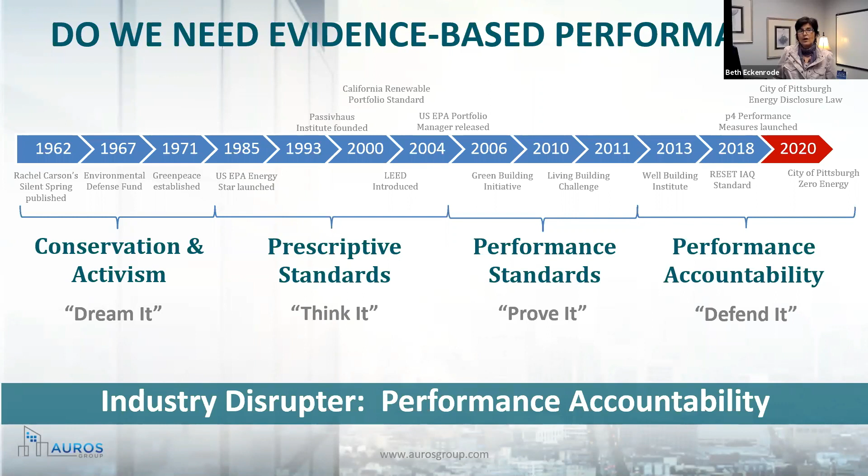It started in the 60s with conservation and activism, and then went into prescriptive standards like LEED, and then evolved into performance standards. But today, it's about performance accountability. And if you are somewhere in the world where there isn't performance accountability, it's coming. And it's coming fast. And it's coming because more and more building owners are being held accountable to two things: environmental health and human health and well-being. Those are becoming imperatives. And so when you think about, do we need it? We believe the industry disruptor is performance accountability.

How do we reach it? And what's the first step to take to get there? The answer to those questions are exactly the same. And Stephen Covey laid it out beautifully with, we have to begin with the end in mind. Ergo, why I asked you to switch from thinking about design to thinking about operations. And so when we think about owner's project requirements, it's a term that's been around in the industry for a long time. And owner's project requirements really started out as almost being like a strategy document. It was a lot of narrative.

Where the puck is going is it's all about metrics. And why is that? Because the easiest way to align team members, think about your team members, architects, engineers, commissioning agents, the best way to align them on a project is to metrics, not to words. Words leave so much open for interpretation. It creates paralysis on teams. Metrics gives teams the chance to bring their expertise to bear and come up with the 1 + 1 = 3 or 1 + 1 = 5 solutions.

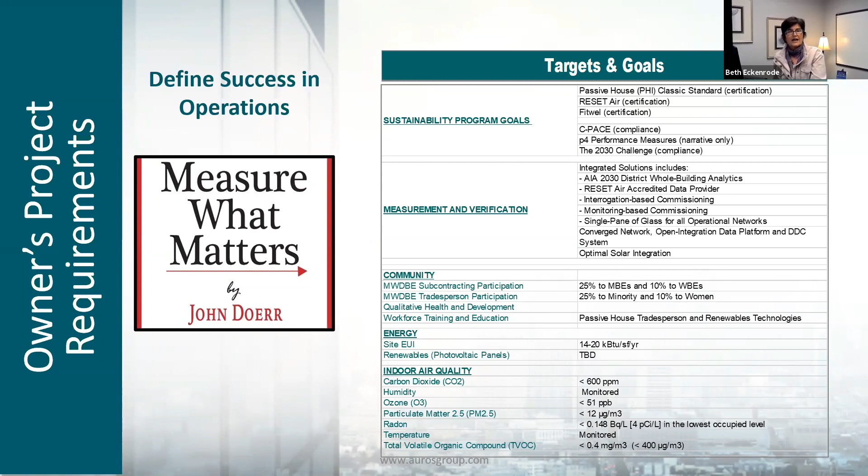So at this point, all I want you to think about is that owner's project requirements should never be about words. It should really only be about numbers. And those metrics should demonstrate what's expected performance in operations. Again, how are you going to define success when you're operating?

And so for us, what we say is, find what's actionable, and really the two threads that weave together all of the goals in the UN SDGs are reduce or eliminate fuel poverty and drive to equitable indoor air quality. And so those threads are really values. And those values underpin the choices that we make. And so if we're really good, our goals will align with our values. And when they do, we know we're moving the needle.

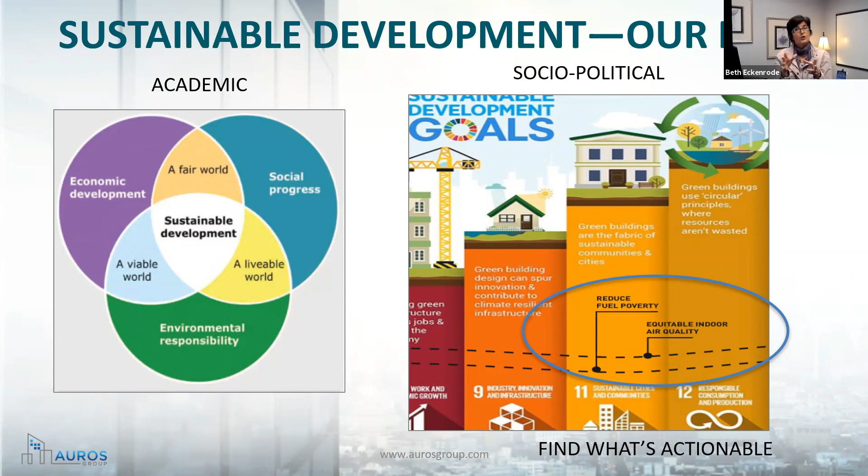We believe any building can be high performing, an existing building or a new building, doesn't matter. But to do so, you have to know, understand, and find a building's potential. And a building's potential, new or existing, is found by merging the digital with the real worlds.

So simulation that meets up with trended data or expected data. For us, this is where technology begins to reduce the risks of boldly stepping forward with sustainability goals. But there are different kinds of technology, right?

Craig's going to go through this in a whole lot more detail a little bit later on in the presentation. But to achieve evidence-based performance, it requires building science and data science. And we can't really conflate the ideas of high performing and smart.

There's a lot of conversation about intelligent buildings, right? You can have a really smart or intelligent building and have it not be high performing. So there's all kinds of technology available to tell you everything there is to know. But we need to take a surgical approach to choosing what technology to employ based on what we expect it to deliver in operations.

So again, we align the thought of high performance with using data from an Internet of Things standpoint, or smart buildings, intelligent buildings. We align those goals to what we've set as metrics along with our values.

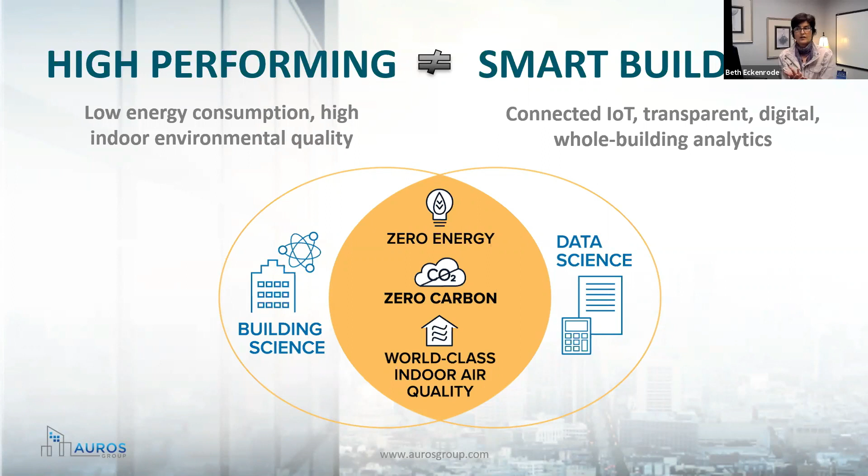Now, we continue to try and drive with a process that will get us the highest performing building at the lowest possible cost, right? Because we're getting really laser sharp and laser focused. We want to find that sweet spot between high performance before we have to pay any premium in the cost of construction. I want to stop for just a second and make sure we're aligned and landed on terminology.

Energy use intensity, water use intensity - these metrics exist to compare buildings and their performance one to another, much like how miles per gallon gives you the idea of the fuel efficiency of one car versus another, or one truck versus another. So for us,

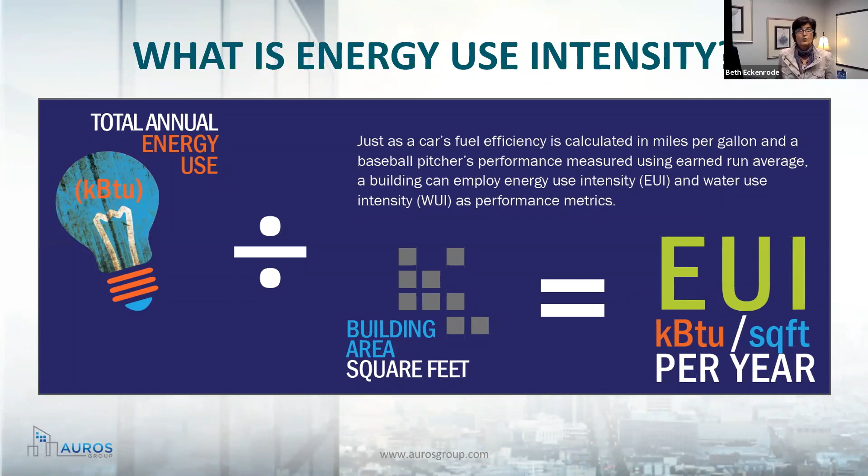setting goals and getting to a really robust goal setting process isn't just a piece of something, it's everything. And no special skills are required to do this. So any building owner, any developer, any team member can sit down and think about how do we articulate the goals of a project against what we want to measure, what we want to define as success in operations.

But we need to cast a really broad net. So I'm going to run through a very quick review of a subset of standards and certifications. As Jay mentioned, we're certified in everything because we never want that to lead our thinking. We don't want to come to a problem with a solution, right?

If all you have is a hammer, everything looks like a nail kind of thing. We don't want to come to the solution because that happens to be the certification. We want to be agnostic and indifferent. And there are a lot of practitioners in the space that think the same way that we do.

This is not unique to Auros Group. But it's important to understand as we go into this next part of the conversation, we're not marketing or trying to push any particular program. We're trying to get to how do you think about evidence-based performance in a way that gives you the most performance at the least cost.

That is going to require thinking about the buffet. And for those of you on the West Coast approaching lunch, I'm really sorry, but I want you to envision a really bountiful buffet, because we're going to go through a bunch of standards that are going to show you various items on the buffet.

So we want to know where the puck is going, and we think the buffet is where the puck is going. So we're going to start with LEED. LEED is kind of the granddaddy of all standards, right? The world owes a debt of gratitude to LEED.

20 or so years ago, LEED really kind of put the path in place for what it means to build a higher quality building. What does building performance mean? And it was all about building design and what to consider to build better buildings. If you could go to the next slide, Craig.

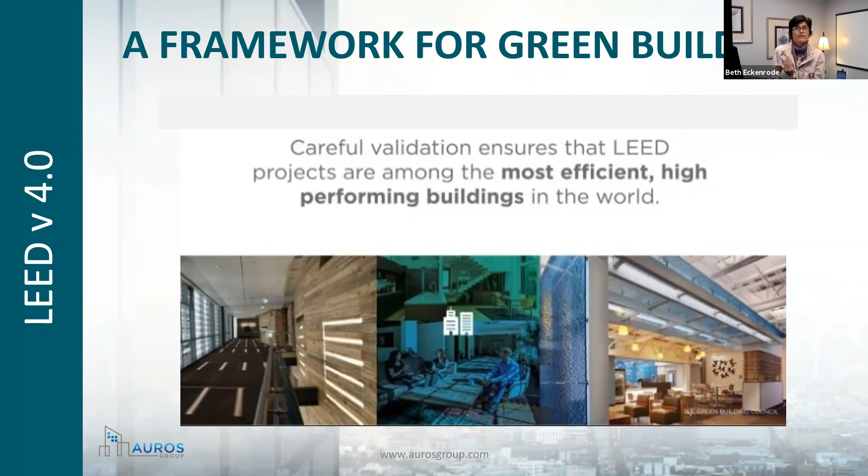And we're going to talk about both in the course of the next few minutes. We're going to talk about both types, and then we're going to kind of wrap it up and explain why that's so important to understand the vantage point from which these standards come as you think about setting goals.

ILFI created the Living Building Challenge, which is based on ecological research. Ecological research is all about the study of relationships between living organisms and their environment. And it's not just living organisms inside the building, it's living organisms outside the building too. It's the environment outside, it's the environment inside. Living Building Challenge really has cast the broadest net of how to think about building performance when it takes an ecological point of view.

It has about 7 petals, and they're grouped broadly along what you can easily call values. They look at values and think about all the elements of this ecological approach, all the pieces that would fit into place, beauty, or equity. They take a values-oriented approach to goal setting, and there are various pathways to reach Living Building certification. All of these, even the ones that look simplest, because of how broad Living Building sets its vantage point and its interests, each one requires a deep commitment. It's very rigorous, and your commitment to individual petals or combinations of petals has to be based on that value. So it's really important to think about how your goals align with your values.

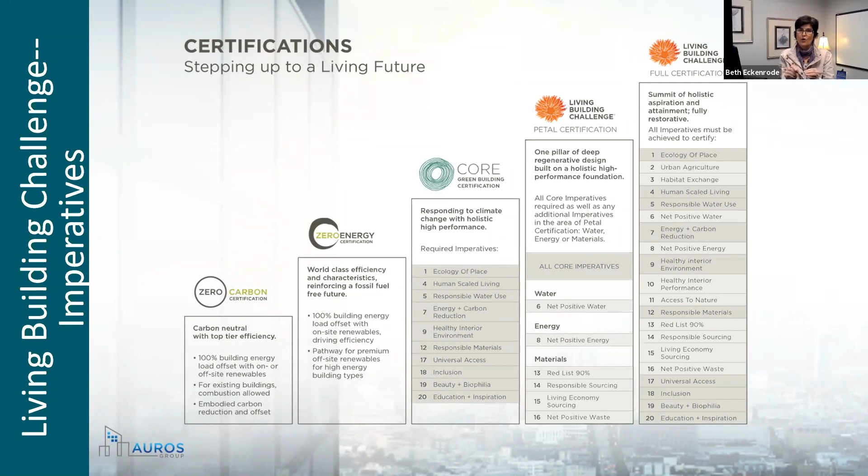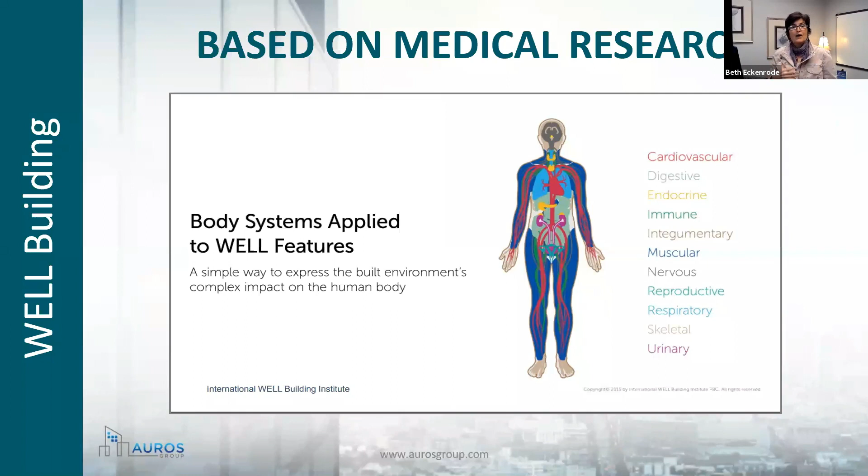WELL says we spend 90% of our time indoors, so we're concerned mostly with one interface, and that's the interface between buildings and their occupants. WELL is based on medical research, but it's based on individuals. So WELL looks at how a building interacts with our individual persons, our body systems, our human body systems on all of these levels. That's the research that WELL brings to the table.

When you think about the comprehensive approach to WELL, it's broad similarly to Living Building, but it's not as broad. It doesn't take on as much space as Living Building does. It's got 10 concepts, over 100 features, and where WELL has teeth is that each one of the concepts has prerequisites. So if you blow a prerequisite, a lot of times in WELL, you blow WELL. There are some teeth associated with WELL that are kind of distinctive. But WELL does absolutely the broadest and deepest job of understanding that interface between a building and an individual occupant.

Now, the middle of last year, WELL came up with the WELL Health and Safety Rating, and we mention this because it's a little bit different than how it approached the broader WELL. This is much more narrow. It's focused on policies and intentions. It was in response to the pandemic, of course. It's had a lot of publicity and press, but it's intended to give building owners and developers the pathway to tell occupants: we're controlling for what we can control. That was really the purpose behind WELL Health and Safety.

When we look at Fitwel, Fitwel is based on public health research. This is a big distinction between Living Building, WELL Building, and Fitwel. Fitwel says the biggest impact we can make on the built environment and people in it is to look at chronic disease and chronic conditions. Anytime you think about public health and chronic disease or chronic conditions, it's about populations in general, not individuals—that's where WELL is distinctive. So Fitwel says we want to look at the health of populations, and we want to look at chronic disease like heart disease, asthma, COPD, obesity, hypertension. All those kinds of things are what Fitwel is concerned about in terms of how people operate and interact with a building and with each other.

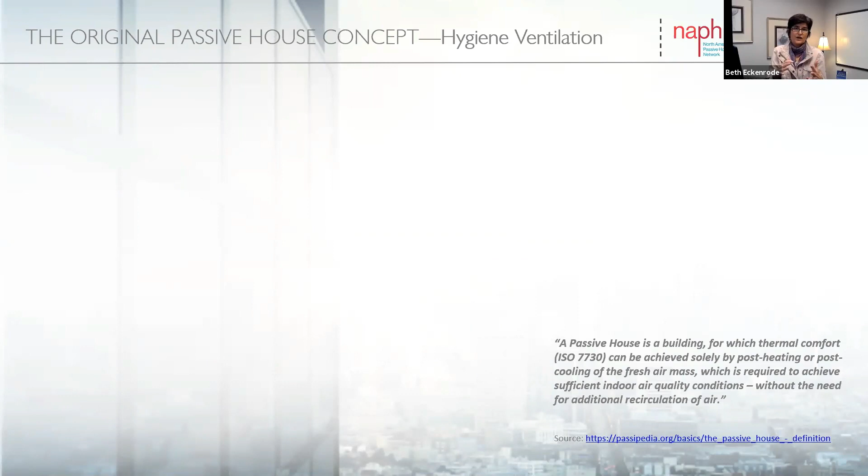What most people don't know is that hygiene ventilation — the idea that we never breathe the same air twice — is where Passive House started its roots, really trying to define how we never breathe the same air twice.

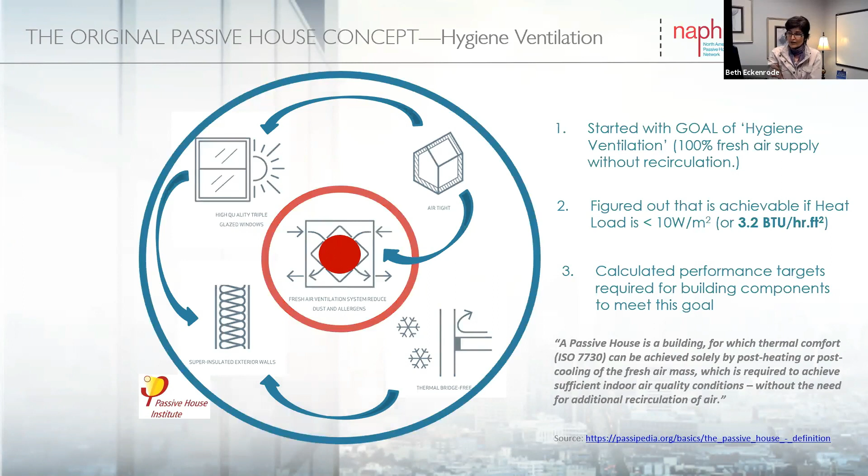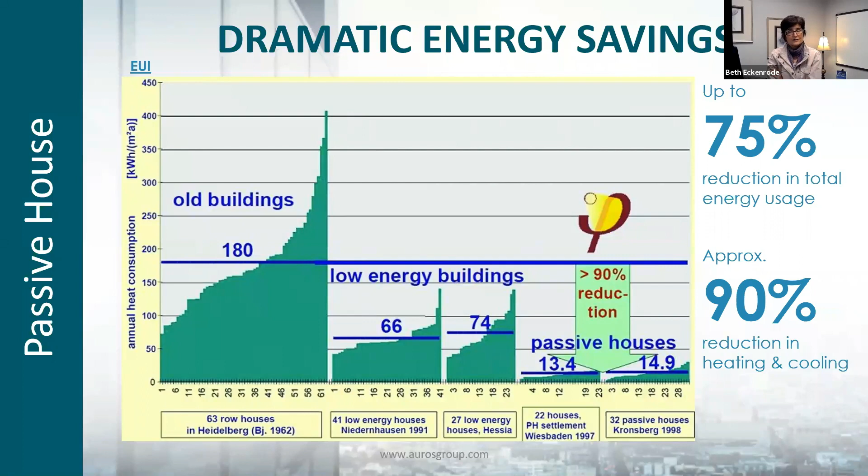However, what Passive House showed is that there was dramatic energy savings. If you remember back in the 70s and 80s, that was what was newsworthy — people wanted to hear about how much you can reduce energy in these buildings. However, today there's as much interest in indoor air quality as there is in energy, and Passive House really enables the conversation about both.

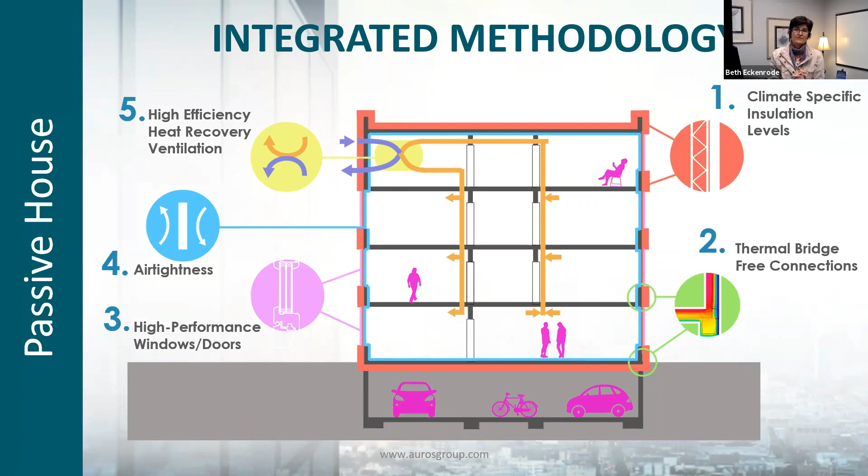So the idea of integrated methodology — continuous insulation, continuous air barrier, thermal bridge free connections, high performance windows and doors, high efficiency heat recovery ventilation — these things all begin to define, from a principle standpoint, what's important, what are the key criteria to consider in order to get to the performance they define. What they're not going to do is say you have to use these windows, or this HRV. They're just going to say you have to achieve this level of performance.

And so what comes out of Passive House is this idea of the natural order of sustainability. It's a little like the order of operations when you learn math — multiplication and division before addition and subtraction. It's the same kind of order of operations: you want to take passive systems first, build the highest performing envelope you can, because that allows you to reduce the size and complexity of your active systems.

The cost trade-off should be similar — you might pay a little more in your envelope, but less in your active systems. The two together create the environment where you can spend the least amount on renewables to get to zero energy. That's why, for example, the city of Pittsburgh, when they talk about zero energy ready, is saying: work all your consumption down using passive and active strategies. Then when we're at zero energy ready, we know we've got the least amount of distance we have to move to get to zero energy. It's the most cost-effective approach to getting to tremendous results like zero energy.

So while Passive House provides the building science to get to both really low energy and indoor air quality, for energy it sets the bar so high, meaning the EUI is so low for what's possible from an energy performance standpoint.

Reset Air does the same thing for indoor air quality. Reset Air sets the highest expectations around indoor air quality performance of any standard, but it goes steps further than most of the other standards.

It goes steps further because it says what's really important is data. So there's what the indoor air quality is, and then there's, are you making it available for people to make their best decisions? So Reset Air says, yes, we have to have high quality monitors. Otherwise it's garbage in, garbage out. We need to know that the monitors measuring the air quality are of a certain quality and capability.

They layer on top of that the standards around where you place those monitors. How many do you need? Where do you locate them in a particular room versus another room? So they set expectations for that.

Then they add on to that, now we care how you manage your data. So to get Reset Air certified, this is the most rigorous and robust process you go through because they also deal with the data. Again, let's go back: to deliver against goals, to set your goals really high and deliver them at par or at the cost of construction, we want to use the best thinking in building science and the best thinking in data science. And all of these capabilities exist today.

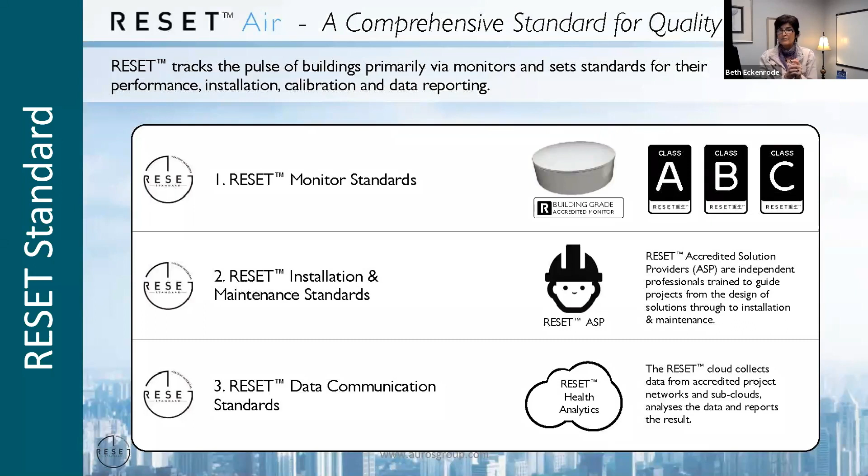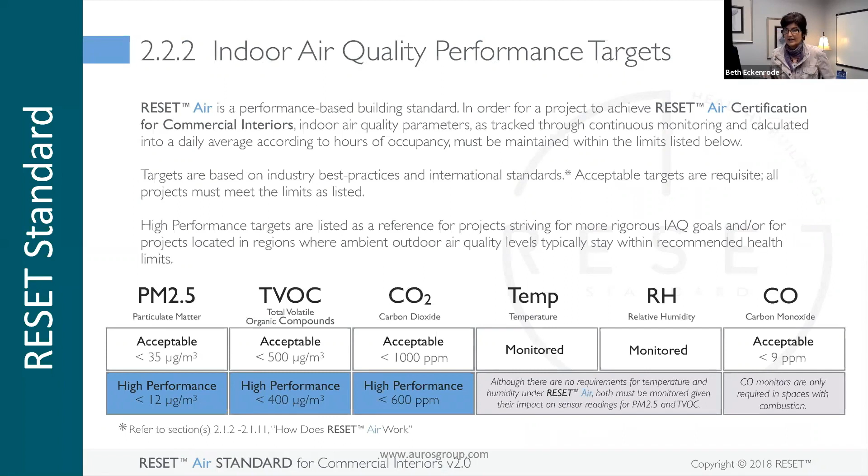The cool interface between Passive House and Reset Air is that we focus on performance where it matters, inside the building and at the level where occupants are living. So we don't concern ourselves with the things that we're not going to measure or monitor, that we won't hold ourselves accountable to one way or another. Again, we stay aligned to goals and values and what we're going to measure in operations.

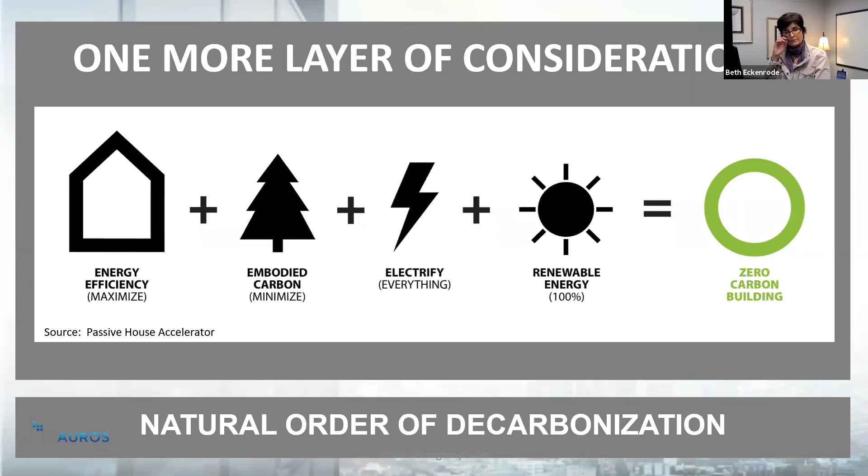So the long way around the barn, as we say in Wisconsin, is that we get back now to how do we set goals. And the reason why we walked you through this review of everything that's possible and how different standards consider different goals is because you want to align it to your values. You want to think about what's important to you.

This takes us back to the buffet. If you want the potatoes, you can take the potatoes. If you want the salad, you can have the salad. So we think about, we might want the water piece from LEED. And Craig is going to, right after we're done with this slide, walk you through a living example of what this looks like. You might want the social equity piece from Living Building.

But what you're able to do is take a very surgical approach to setting your goals against the things that you're going to measure and the things that you actually want to be held accountable when that building is operating. What do you want to say defines success?

So I'm going to turn it over to Craig, and he's going to walk you through a little bit more building science, goal setting, and data science. Thanks, Beth. Hi, everyone. My name's Craig Stevenson. I'm really excited to be here with you today and talk to you guys about evidence-based performance. And evidence-based performance really starts and almost ends with setting your own goals.

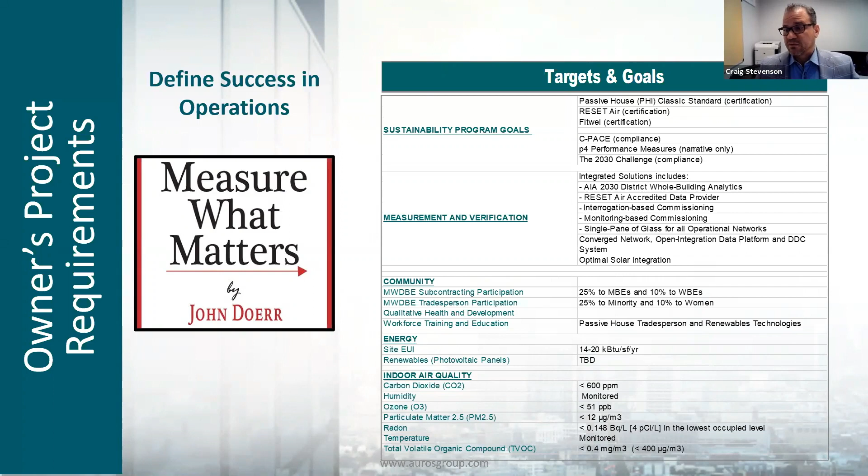Indoor air quality. When you get a copy of the presentation, you'll notice that a lot of these goals that you're looking at in here are built around the most aggressive goals for each of these metrics. These happen to be RESET Air because RESET Air represents the most aggressive, as Beth said, across every sustainable certification program. RESET Air has the most aggressive air quality thresholds, but they are achievable.

And you can start to go through and you'll notice in our OPR, we're actually referencing goals from different sustainable certifications. We're sort of, if you will, cherry picking our way through the best thought leaders, the best sustainable programs that exist for each of these different parameters of quality as you start to consider this.

So the idea here is create our goals early, create an alignment and an owner buy-in, and then start talking about how do we connect these goals to some form of technology or feedback loop so we understand if we've met those goals. We like to think about energy and air quality because when you start thinking about how you achieve these goals, foundationally, the envelope really dictates whether or not you're going to be easily able to get to those. And the cheapest form of energy at the end of the day is the energy never used.

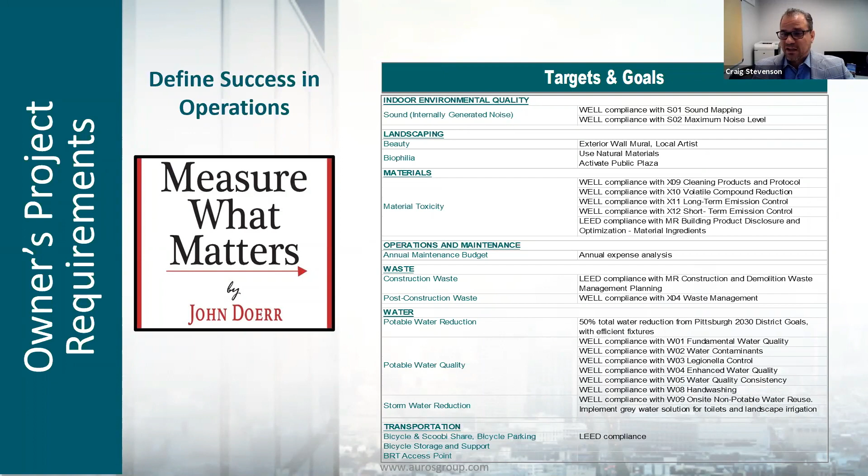So as we go through that, then it becomes how, okay? How do I set my OPR? I feel really good about my goals. Everybody's coming out of our charrette feeling energized, and we feel powerful, and we want to go tackle the world. Then it becomes when. How do I do this?

We're making our biggest decisions on our projects most of the time in very early SD. When you start talking about massing and orientation of your buildings, if you have a new building, when you start talking about window to wall ratios, even for existing retrofits, when you start looking at your envelope optimization, those things are happening really early in SD.

If we wait till the end of SD and we want to go back and talk about our envelope in DD, it becomes really challenging. Most foundational systems are kind of already set, and then all of a sudden we're set in our ways and we can't go back and change. It's a commitment early to the goals. It's using iterative estimating and modeling to start identifying what can we do early.

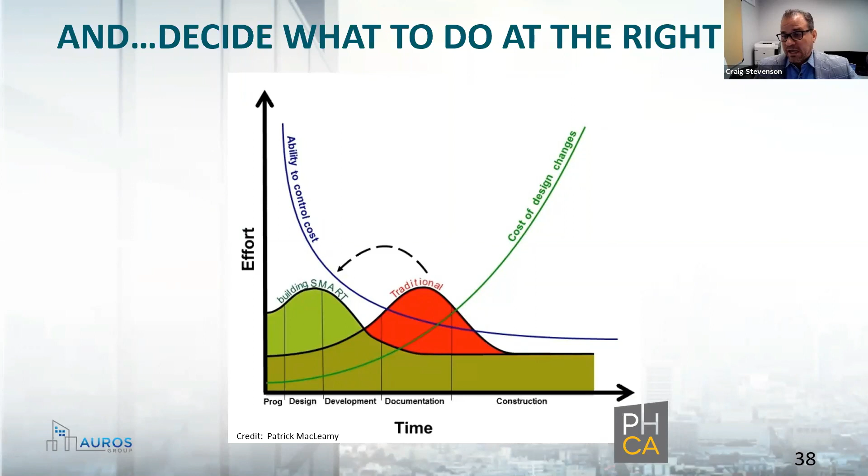So what's the map look like? This really is your critical steps in the process as you start thinking about this, right? How do I get from point A to point B? How do I keep the project team energized and aligned? It takes a strong owner, an owner that's going to commit to an OPR and really have those conversations at every progress meeting: where are we at in terms of our goals? And then it takes a commitment to doing iterative modeling and iterative estimating early.

Even if you don't onboard your general contractor early, you can use third-party estimating to start to answer those questions, because architects are always going to want to know the differences between insulation values, differences between cladding, and how that wall is getting put together. Those have to be answered early. They cannot be answered in value engineering, quote unquote, when we get to construction. It's way too late for that.

And then if you respect the natural order of sustainability and you're looking at your envelope first, your active systems second, and renewables last, you want to start to build out those specifications, again doing that really early in the process. And then you start to look to your integrated network, which is your technology-based feedback loop in the buildings, to start getting those feedback loops built in.

This smart building infrastructure, a lot of people think, wow, I can't afford smart building infrastructure. Well, if you're into any kind of commercial building and you're putting in a proprietary BAS, we're arguing with you, you can afford smart building infrastructure. The macro trends in that industry are moving into open integrated environments, and there are cost feasible ways to put great feedback loops in buildings, including RESET Air and other technologies, to get those integrations between design and construction and operations.

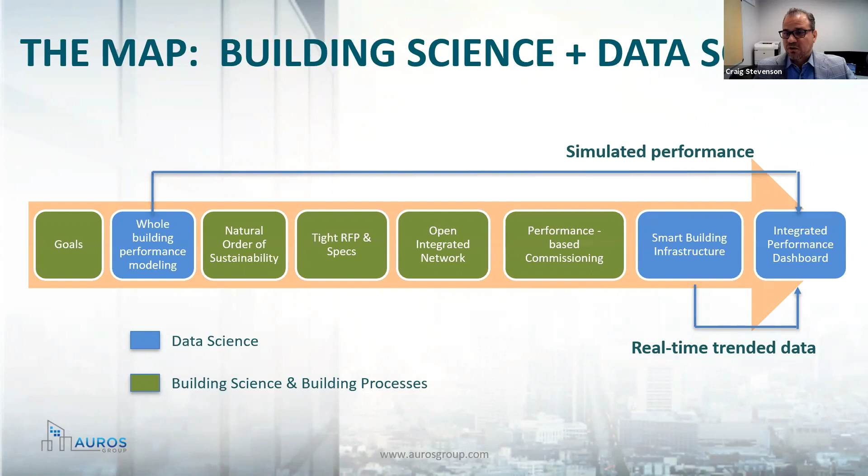So when you think about how we are going to start connecting our feedback loops to our goals and targets set in the OPR, you need context, right? Everybody looks at this a little bit differently. If you've gone into any space on dashboarding, you'll hear them talk about histories. We use history to do that: we were better than we were last week, or better than last year, or the average of the last 5 years.

Or they use peer review like CBECS databases, and they start saying, well, we're a commercial office building, we're better than CBECS by X%. Or they use simulation. The macro trend in the market is moving to simulation. Simulation is by far the most contextual. We can export from simulation all forms of energy dynamically into a dashboard, and this is what you're seeing here.

And we can export temperature, humidity, relative humidity, and CO2 for buildings. So we have parameters for air quality we can look at as well. So the idea is, when you start to think about your feedback loops, how do we deploy meters and sensors, IoT, in a cost-effective way? And then how do we connect that to our goals and targets?

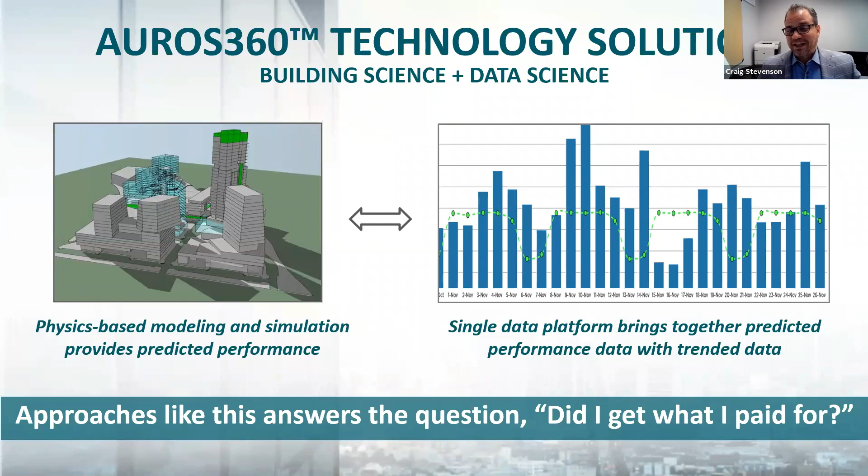We don't want to over meter our building. We want to meter our building just right to give us the feedback loops on our owner project requirements. And then the question ultimately is, did I get what I paid for, or did I meet our goals and targets?

So when people talk to us and ask us about measurement verification, and this is a common question that comes up because a lot of people think that this is cost prohibitive, and we argue it's not. There are 4 main components to any measurement verification in a building. And the 2 things that really I want to align you on and have you start to think about is that 90% of our clients will buy the dashboard because it's the GUI, it's the shiny object. It looks really, really nice and neat.

So they're going to basically go into the market and start searching and looking for dashboards that just have this really shine to them. But there's too many dashboards out there that we've seen that have no guts behind them, right? It's a great visual, but the data behind it's in jeopardy. It's on premises. It's not connected to the IoT in the way in which we want it to be connected. So it's coming directly from that and not being tossed through an analytic or a building automation system.

But the real work here, when you start to consider this, is this intersection between the operational technology, the data aggregation point, and this historian. And how we get data into a single platform for this single pane of glass concept. How do we start to get data into a position that we can use it to our benefit, and we can start to consider it for operations using analytics like fault detection and diagnostics or condition-based maintenance.

So the deal here is that we want our buildings to have a platform for meters and sensors that's flexible. Roll off the obsolete, roll on the new ones, and not take any hits at all. We want it to come through a converged network or a network system that's not going to have to change out. And it's not 10 networks for my BAS, my fire alarm, my lighting control. It's one network. It's a converged network that combines enterprise technologies and operational technologies of buildings. And then it is free flowing directly into our backend, our time series, real-time historian.

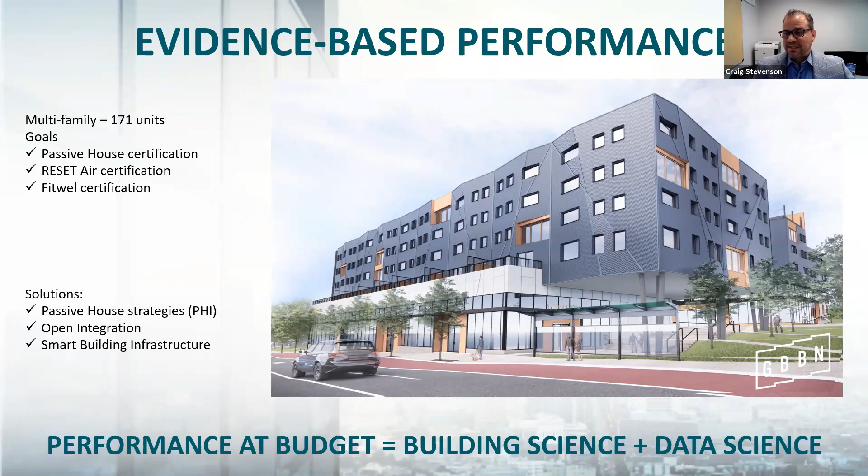Hey Craig, go back on your slide because we have a question, and I think that slide is a great place for you to answer this. Jamal's asked a few questions, but I'm going to get at his last one first because it fits with this picture right here. So he's asking, are we talking about a technology similar to digital twin here?

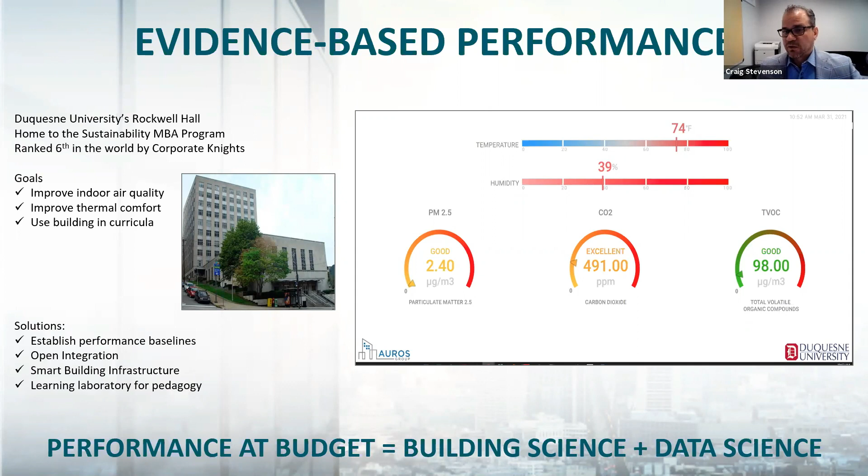Digital twins really can enable an evidence-based performance discussion on a project. But think about when they really come on board—a lot of times we see digital twins coming in as FF&E, like furniture, fixtures, and equipment. They come in with the IT at the end of the project when we're all said and done. Well, if we set our goals, are we making sure we're connecting that digital twin concept back to our goals and targets? I think that's the work we have to start doing to really see digital twins scale.

We also have to figure out how do we not pay duplication between a building automation, building management system, and a digital twin? We're seeing a lot of duplication right now because clients are bringing in digital twins for their value, but they're missing the opportunity to remove the redundancies and duplication of costs from control systems for operational technologies. As a follow-up, Jorge is asking: is the feedback loop or the historian digital twin related conceptually?

I think there are some construction projects out there using digital twins that completely understand evidence-based delivery, and they've created a great OPR, connecting their OPR to their measurement IoT. If they're doing that, the digital twin would be related conceptually to what the project is intended to do.

We've seen too many times that the IoT is deployed, and meters and sensors are selected without regard to the OPR. Then we want to bring in a digital twin and lay it on top of the building like a layer, sitting there as a tool that's not really integrated into the design intent, the engineering intent, and the actual deployment of meters and sensors. In that instance, the digital twin is a bit disconnected until it has a chance over the next few years to burn in and have the owner figure out how to make it work.

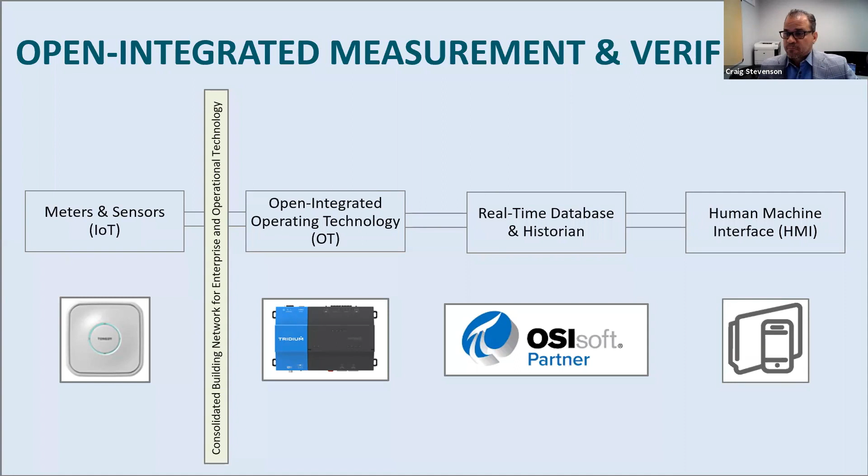So just to follow up, as someone not in construction, is the digital twin effectively a model of the building? There are two models we talk about in buildings. You have a BIM, building information model, which is your 3D model—Revit typically is a very popular three-dimensional building model. That's more CAD. Digital twins can take their data and show it in a CAD environment.

But a CAD is not a real-time time series historian—it's just a way to connect and show data. We can do that all day long. The time series real-time historian is the back end. That OSIsoft PI I showed you is the historian you'd typically want to target when talking about a single pane of glass or a data lake to bring all that data into.

Niagara has a really nice analytical platform, and AWS has a platform too. Depending on which vendor is offering those services, they can be open or closed, so be careful when you look into those environments. There are others like Coppertree, OSIsoft PI, like I said—probably 10 to 15 different time series environments you can look at. As you do it, I'd challenge you to think about it in terms of openness and access, not proprietariness.

So I will finish off these last two slides, and then we'll go back and answer all the rest of the questions, because we got some really great questions, Craig, and we can reference maybe some of our earlier slides to do so. But we promised a framework of actionable steps, and I don't want to miss these last two slides.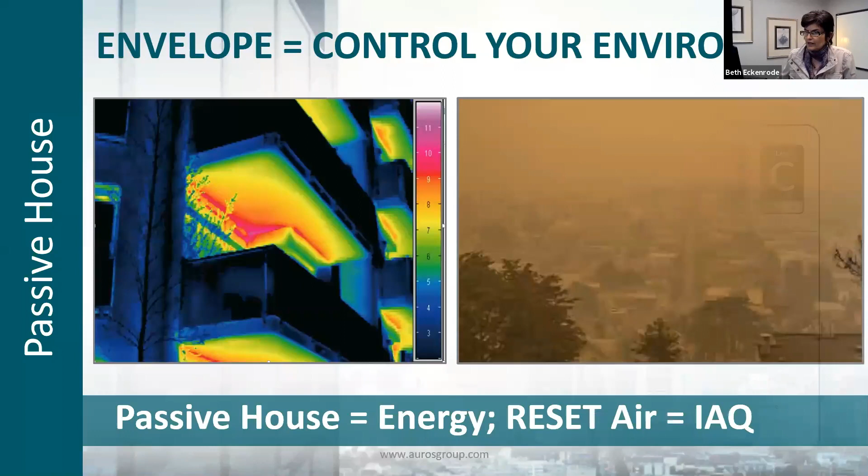So then, Craig, if you go back to slide 35, I can pitch a couple questions to you from Jamal. Jamal's question is: do you think the gap between standards, meaning theoretical, and application, meaning practical, has diminished or narrowed?

I think I wouldn't classify it as a gap. If I was looking at this, I wouldn't classify it as a gap. I would classify it as a change in the way in which we look at buildings. We're moving away from prescriptive-based standards. We're moving very, very quickly into evidence-based standards or performance-based metrics. And we're starting to see early indications of outcome-based criteria.

If you look at New York City's climate action plan, for example, it's legislation that all buildings must reduce their carbon emissions by 40% by 2030 and 80% by 2050. It doesn't care how. That's an outcome-based criteria. So I don't necessarily think that there are gaps.

I do think there's a lot of valuable insight, research, and valuable white papers relating to all these sustainable certification programs, and we respect them all. That's why we select from those the best things that mean the most to our clients, and we use them. But it's moving away — those standards still using checklists and prescriptive-based criteria are quickly becoming obsolete. We're starting to see a transition to performance-based criteria, and more importantly to outcome-based criteria, which needs a measurement verification system to prove.

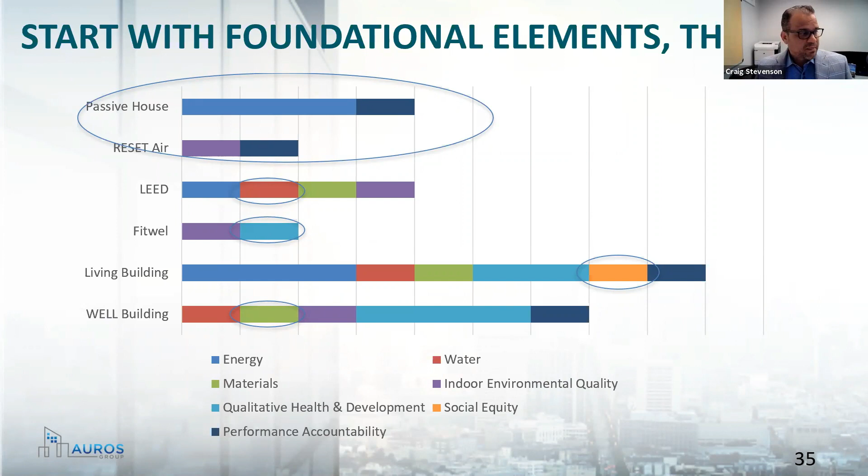So the way we look at this, I think there's a best practice here — Beth, maybe I can go to your slide, let me find the one you always talk about. When we think about this slide, the question becomes: BREEAM is more of a European standard, we don't see a lot of it in the United States.

LEED, we certainly do see. The older programs, the ones that aren't considering energy as well as others, are working their way top down. So if I have a hospital with an average EUI via CBECS or Energy Star Portfolio Manager of 197, what those programs are talking about is doing 15% better than CBECS, or 15% better than ASHRAE, which is our standard. And they start working their way down.

When they do that, they are not able to tunnel through the cost barrier. And there is a cost barrier here where you have to get to a point where your equipment becomes small enough that your envelope starts to pay off. And that cost barrier works down here.

So what we start with, and we think is the best practice, is identify either retrofit, or new buildings. What is the optimum performance of that building? What is the best? And take the metrics of cost off the table just for the quick early analysis. And once you do that, then look and say, okay, how far are we away from being able to afford that? And then work your way up.

So if we start saying, well, I can't afford triple pane windows, but I can afford a passive house envelope, well, then what's the double pane windows do? As long as you're meeting your durability issues, right? The wall is still durable, it's not going to fail, and you're meeting your thermal comfort issues. Can we go to a window that's less expensive, and what does that do? So I'm making decisions from a financial perspective, but I'm coming up.

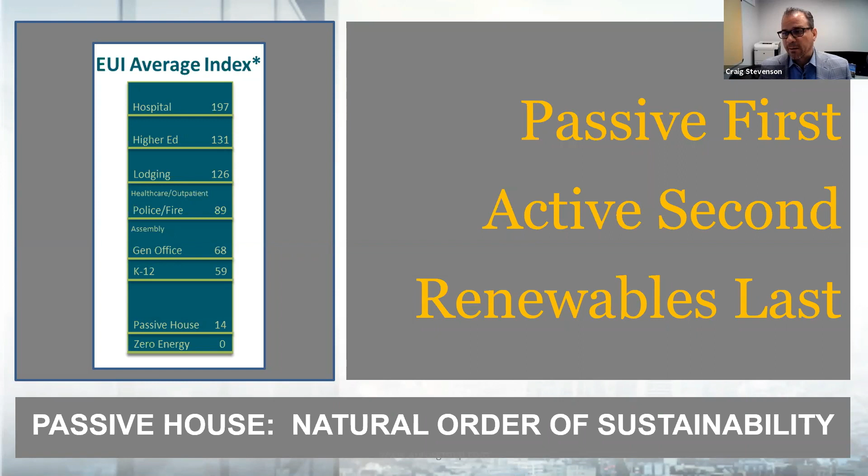So then, you know, funny you mentioned EnerPHit, because Jamal has two questions relating to EnerPHit. The first one is about existing buildings in the UK. So his question is, passive house design standards might be too restrictive to be achieved in most of the UK's existing buildings for retrofit. Even with the EnerPHit standards, many so-called hard to treat buildings are still impossible in terms of achieving such requirements.

And then he went on to ask, which maybe you might want to flip to the cathedral, because he went on to say, has the cathedral achieved EnerPHit requirements? So it might be interesting for you to kind of answer both questions through the lens of East Liberty Presbyterian Church.

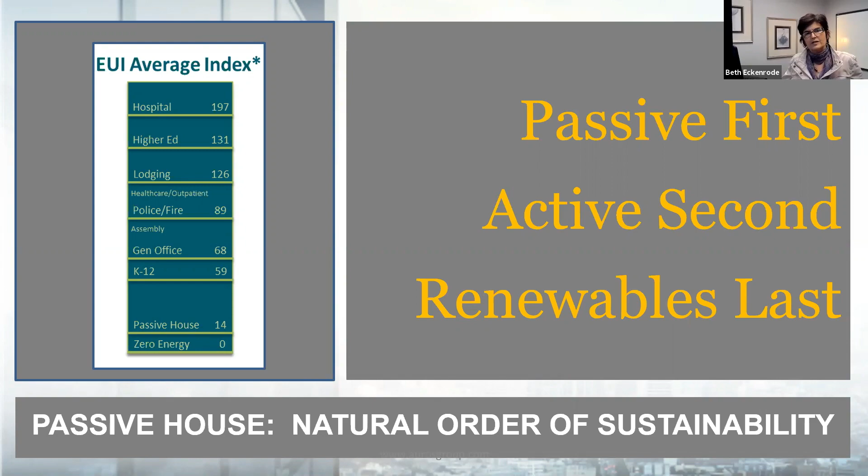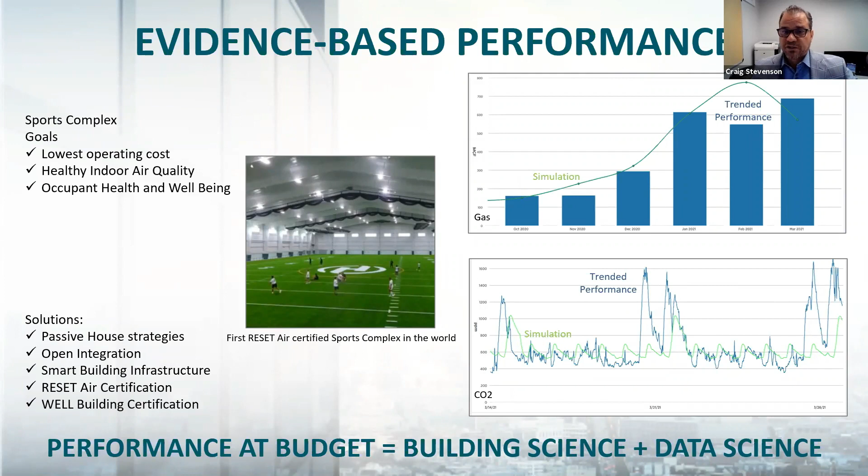So we've been on many projects where we weren't able to achieve, for one reason or another, full performance metrics for, say, passive house, which is the most aggressive building performance from an energy consumption perspective of all the sustainable certification programs. We've been on many projects where we can't hit it. So we start using passive house strategies like the project I showed here. This project, because it had a lot of pre-engineered metal building connections, couldn't get to passive house building performance standards, but we use passive house strategies. And that's the same thing we did here.

The failure points you want to be concerned about when you're using passive house strategies, and this is a caution because it could be a little bit challenging, is that you got to make sure that you're managing your wall durability and your interior thermal comfort. You do not want condensation to build up on a super insulated wall that hasn't been managed properly in terms of modeling. And you don't want your systems to be not right sized, but undersized, because you're losing more energy through the envelope than you originally planned.

So using passive house strategies requires some experience, and it requires using someone who has a deep knowledge of building science, but it can absolutely be done. And to your point, there are many projects that simply can't go all the way to a full passive house certification or an EnerPHit standard. And at that point, we would say that you can still work your way from the bottom up and still be 50% better than working your way from the top down.

Great. So there's a question. Oh, I'm sorry, Beth. May I? One more? Yeah, please. Because they asked a question about the cathedral.

Yeah. There's no way we did a thermal bridge mitigation or an envelope improvement at this cathedral. This is a limestone building inside and out. What we did is we didn't give up on all the passive strategies, though, right? Doesn't mean you have to kick everything out. What we did is the windows, they were the original windows, they're single pane, but they were very air leaky, right? Because they warped over the years a little bit.